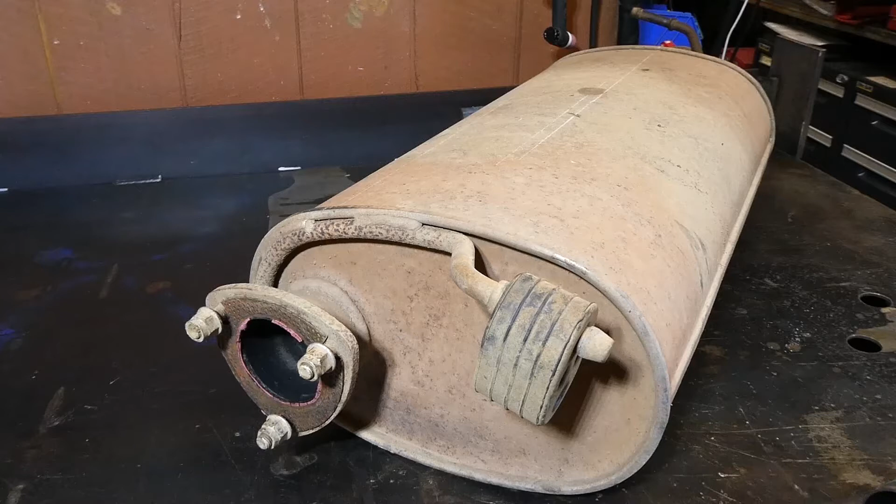Here we've got a Land Rover Defender muffler, which is due to be swapped out for a little bit of exhaust work on the car. So yeah, this particular unit's all mild steel. We've gone through the steps of marking up the lines, roughly, the inlets and outlets. They are offset by about 85mm.

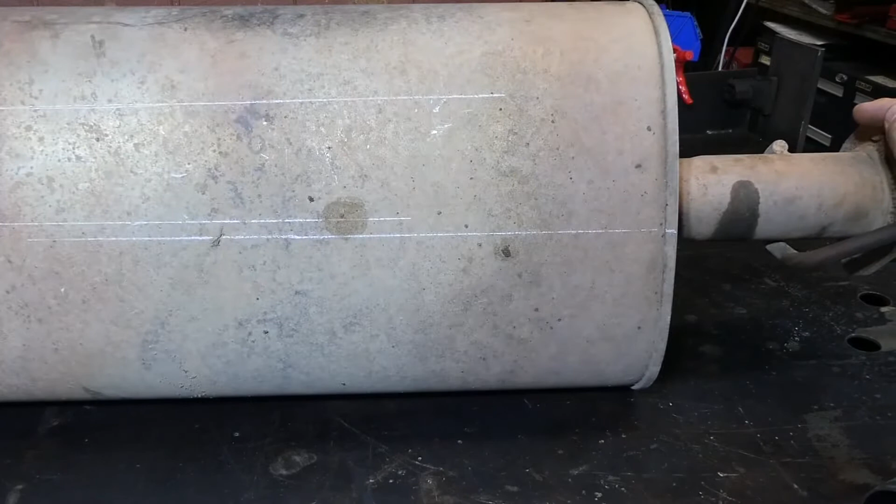So what we've got is the opportunity to make some exhaust piping with a fairly steady bend to allow this whole unit to be replaced. So we've got a 3-bolt exhaust flange on that side. On this far side we've just got the old 2-bolt style.

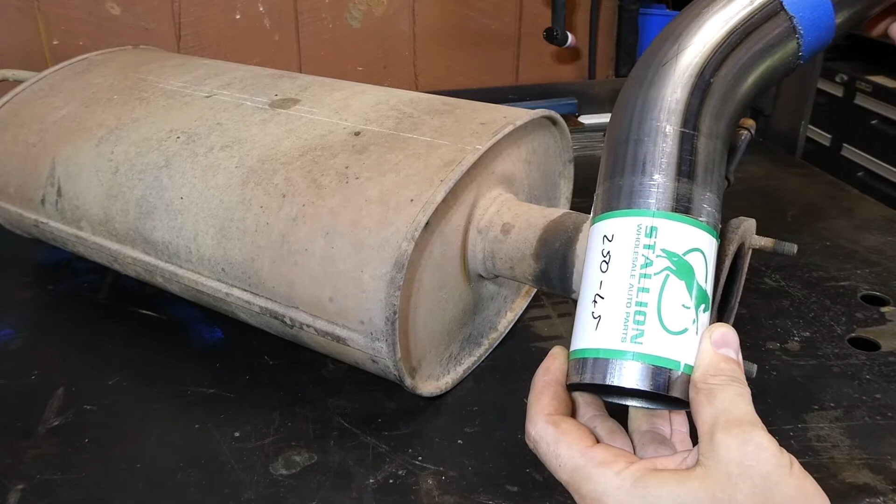Yeah, we'll be replacing it with these sections of aluminized mild steel exhaust piping, which has been marked out and cut on the bandsaw. So this is a 45-degree bend. You can buy these off the shelf. This is a 2.5-inch diameter pipe.

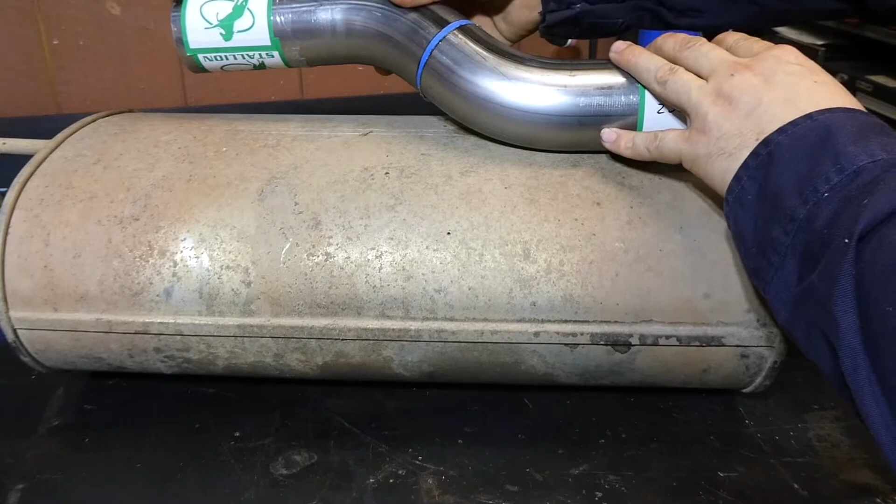So yeah, with this we should be able to get the whole unit squared away with a series of bends which will match the required angle. So yeah, we'll do some welding on this, run through a few little features and things that we're doing with the welding process and the prep potentially, and see how it works in a real world application. So let's get into it.

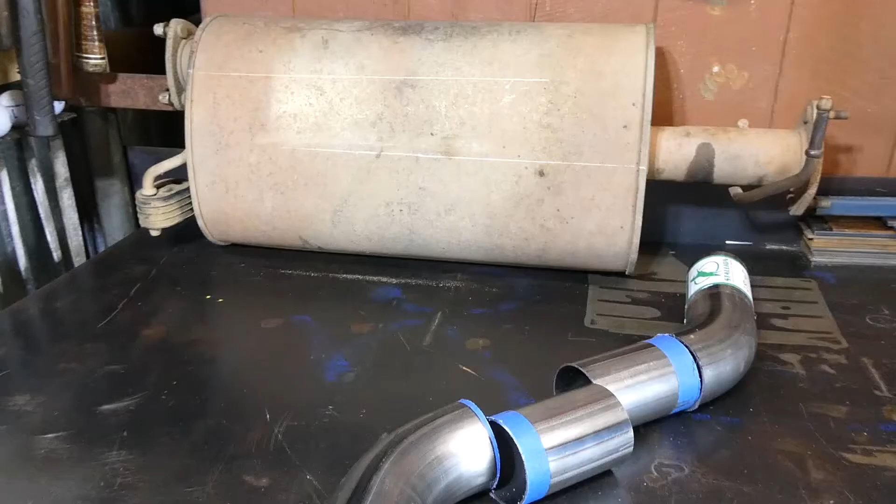So the concern with getting this exhaust pipe made is that we've got this muffler here with an offset pipe inlet and outlet, and what we've got here is two lines which are roughly 85mm apart. We're just using 80mm as our offset, just as a round number. But the problem we're faced with is we've got our two 45-degree bends, which we can see here, and we need to pretty much chop a section out of the middle, like you can see we've done, to make sure that the outlet on this side and this line, where they join, creates that 80mm offset.

So to do that took a little bit of thinking. Thought I might go through the rationale of what a bit of basic, really amateur level pipe fitting might look like. So we'll pause it here, I'll get some drawing happening and we'll see if we can explain it.

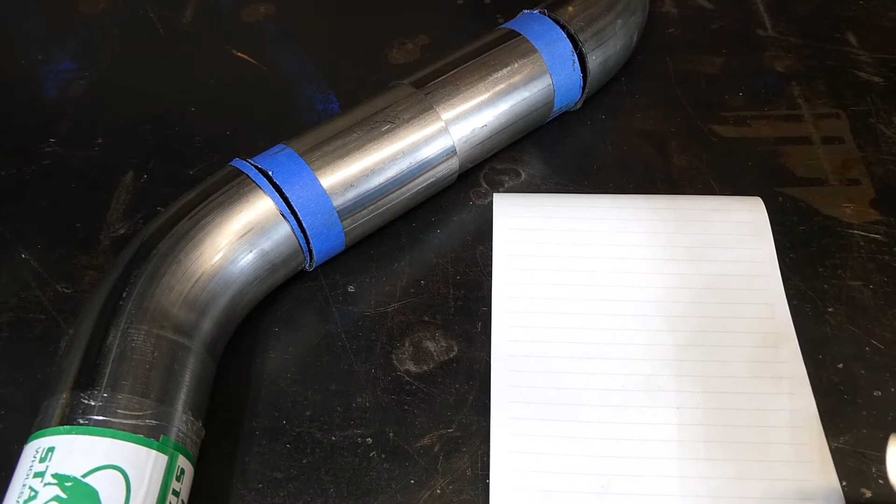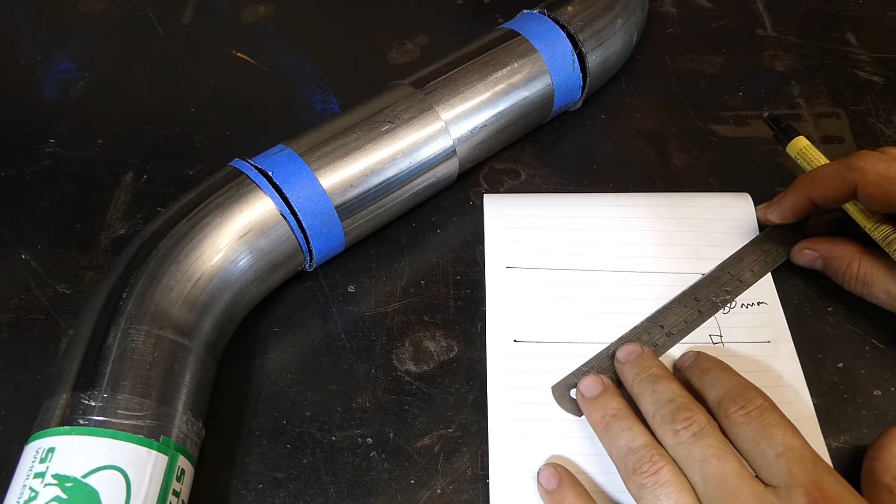So yeah, thinking about our conundrum, we've got two pipes, an inlet and an outlet, and we can assume they're sort of parallel lines. And then from there we know that this distance from here to here is 80mm, and we'll assume that's a right angle. And then essentially what we've got is a right angle triangle with a 45-degree bend here, which is our first pipe, and sorry, 45-degree here, of course, and then 45 degrees here.

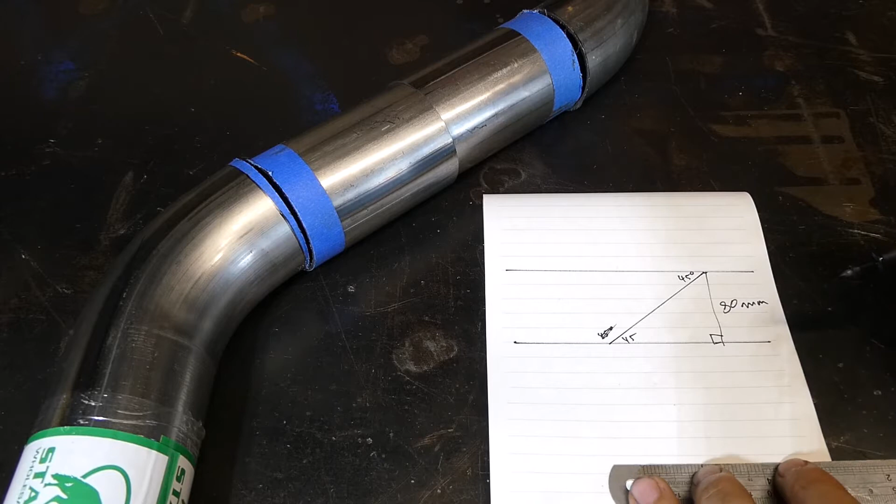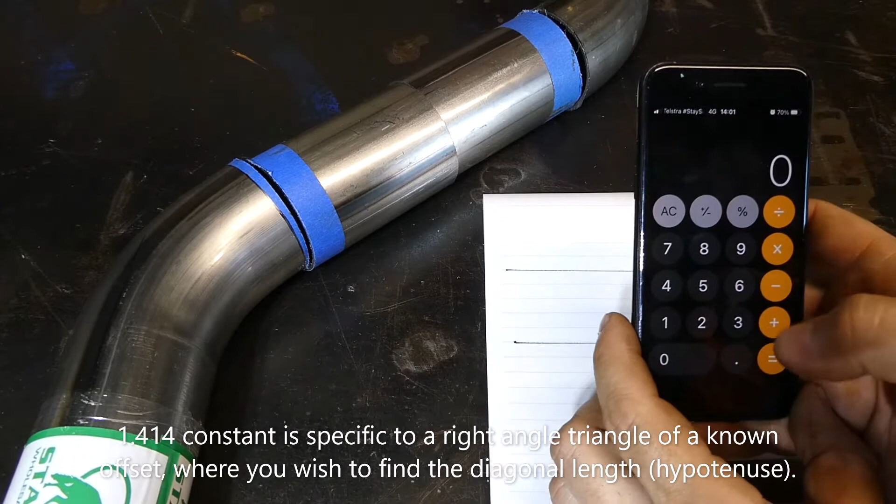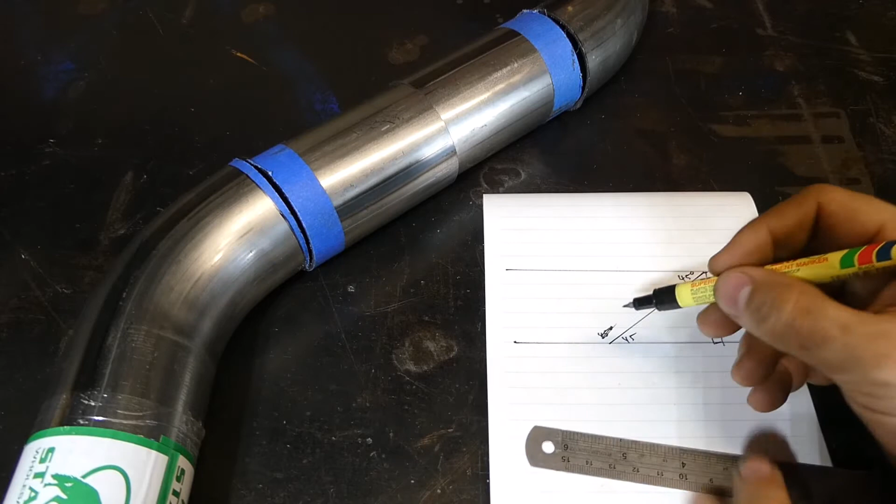So from there it becomes a trigonometry calculation, which people may remember from school, but long time ago. So the rule of thumb to use is the constant for, I believe it's one of the trigonometric functions, which is 1.414. So from there we'd take the 80mm offset, this amount here, times the constant for 45, which is 1.414, and that gives us this number, which is essentially the distance between the center line of this pipe, which is a 45-degree bend. So if you can imagine the exhaust pipe goes like this, and this line is actually the center line of the pipe.

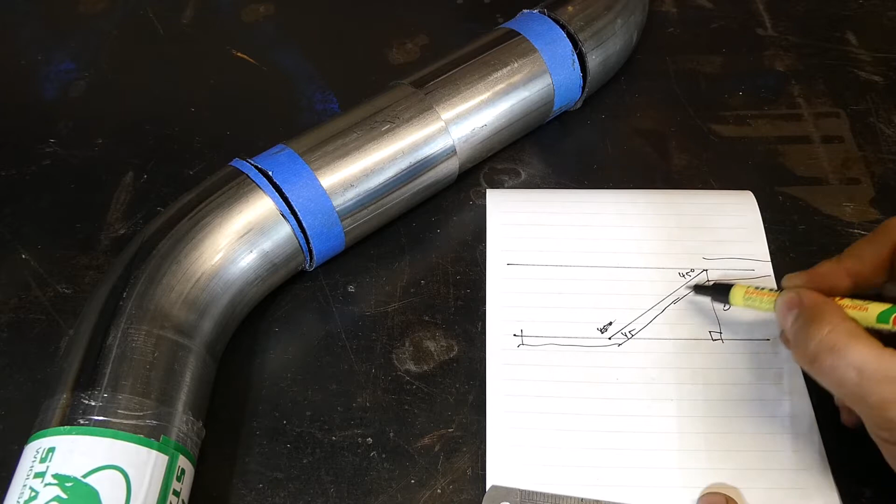So when we get to it, we can get our pipe. I don't even know whether you'll see this. There it is. So that line there is roughly the center line of this pipe. For all intents and purposes on this job, we just eyeballed it. And then from this point here, which is the crossover between the center for this length and the center for the length we've cut off, from that point there, 113 millimeters is where we made our cut.

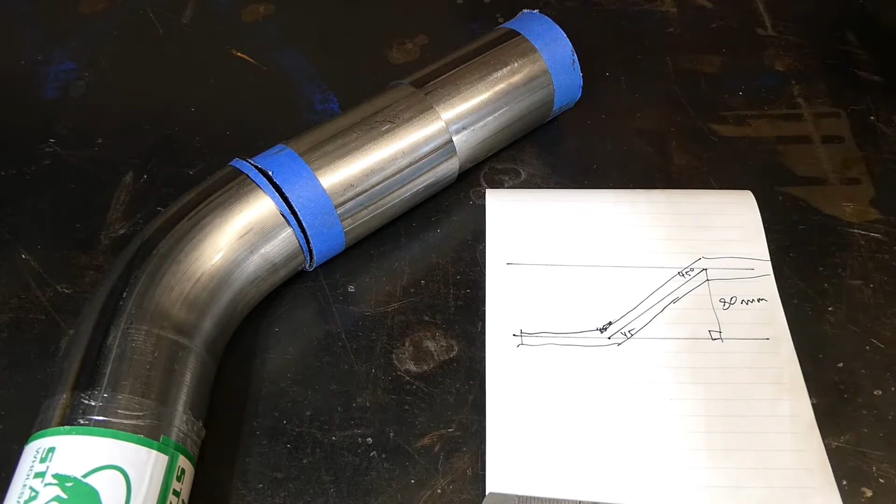So that gives us the cut lines that we have to make, which now gives us roughly, within exhaust pipe tolerances, which aren't massive, our offset that we need of 80 millimeters. So yeah, that's the easy way around it. The alternative is to cut, fit, measure, cut, fit, measure, and a fair bit of work, but remembering the constant of 1.414 and multiplying that by your offset height, you can quite easily get the number that you need, and that will put you pretty much in the ballpark.

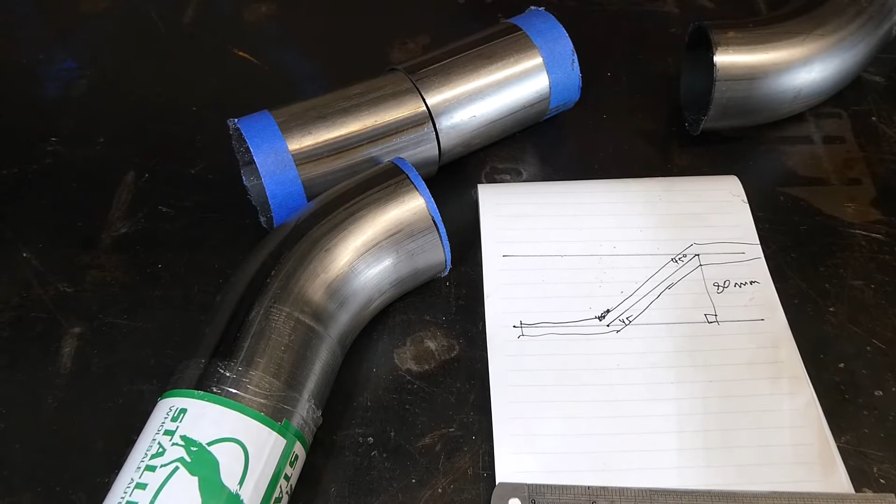So yeah, next step, we'll clean the pipe up and get it ready for some tacking. So to prep the pipe, we've cut it on the bandsaw. We've got a bit of a burr on the inside, as you might be able to see. See it quite pronounced over there. So we've got this handy dandy deburring tool, which we can just run around the inside.

And that cleans it right up. We've still got the outside to worry about. We've still got the remnants of our tape on here that was there from our markup phase when we were trying to measure our circumference around the pipe. In a perfect world, we'd have something like a pipe wrap or something that's a bit less flexible in its long dimension to allow us to go around the pipe, but for this one it was just a piece of tape and we just sort of eyeballed it.

The bandsaw that I used cuts somewhat straight, but from there there's a bit of work with, in this case, a half round file, which will clean it up and give us a good enough finish to get a weld on. So yeah, we'll do this off camera and come back when it's ready to weld.

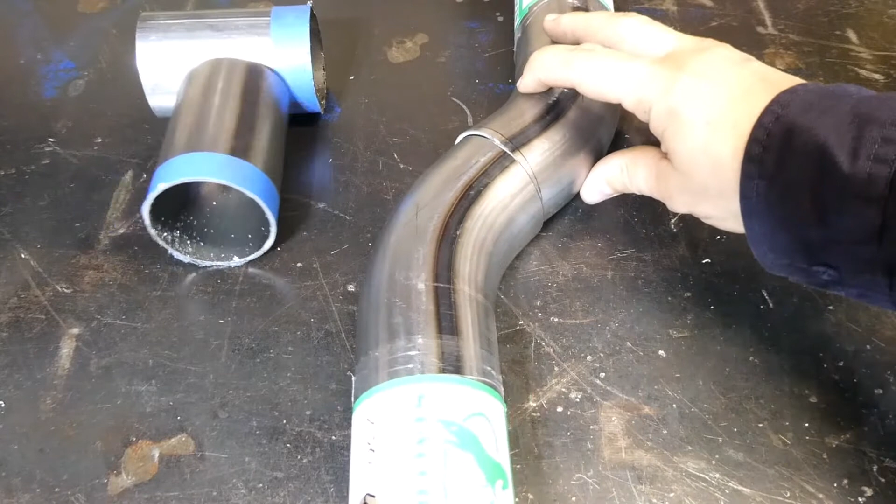So yeah, started out, silly me, had the hand tools out, then realised I've got a linishing belt on a multi-tool on a bench grinder. So gave that a bit of a razz up, a bit too noisy and wild to have on camera with any sort of worthwhile content. Cleaned it right up. We've got some nice straight edges, somewhat straight edges, which now gives us an almost perfect bend to allow our 80mm offset.

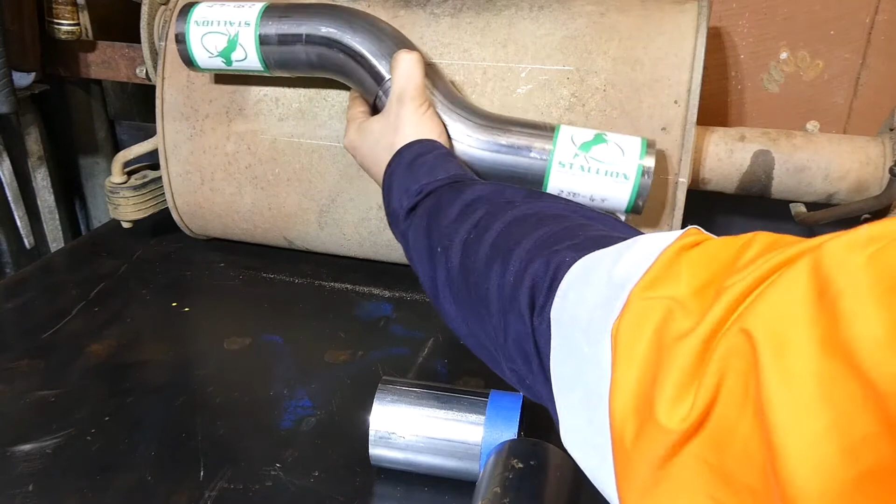So there we are. That's what we've got. As it stands, the distance between here and there is about 80mm. So that will meet our offset requirement for our replacement of our muffler. So that will fit right in there like so. Hard to see with a hand in the way, but you get the idea. And that's ready to start fitting up. So yeah, here we go.

So before we start welding, I'll just go through the setup that I'm using. This is the EWM torch for the Tetrix 230 that I've got. This is a 26 series TIG torch. And what I've got with it is the stubby kit. This is a stubby kit from Binzel, who make a lot of welding torch related gear. Thought I'd run through the setup.

It's pretty basic. We've got a gas lens, which has got a gauze. This is for a 2.4 tungsten. So this just screws into the front of the torch like so. It's just finger tight, and then I usually, don't hate on me, just give it a little bit of a turn so that it makes electrical contact, not enough to bugger the threads up or anything.

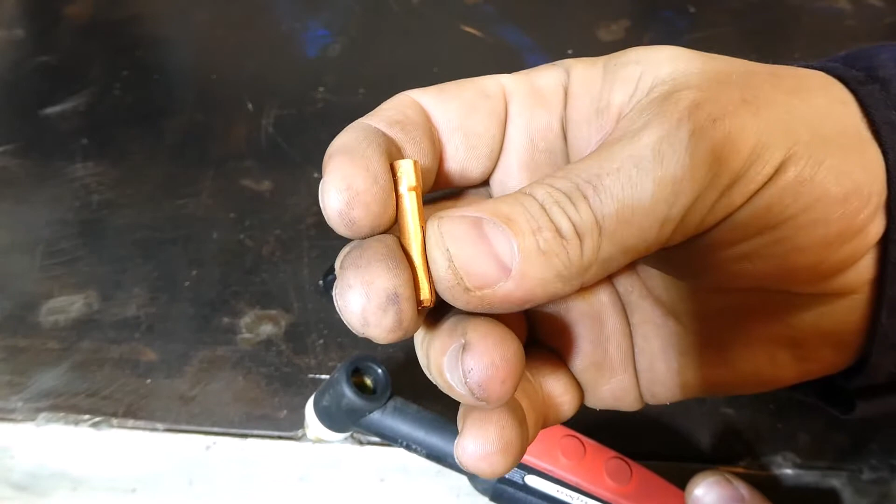We've got a short collet, which is a split type. You might be able to see the split. That just grips the tungsten by compression. These are specific to the size of tungstens you use. Here we've got a nicely sharpened grey tipped ceriated tungsten, I think it is, which is nice and short, so that will go into the torch assembly like so. Probably do it from the other end.

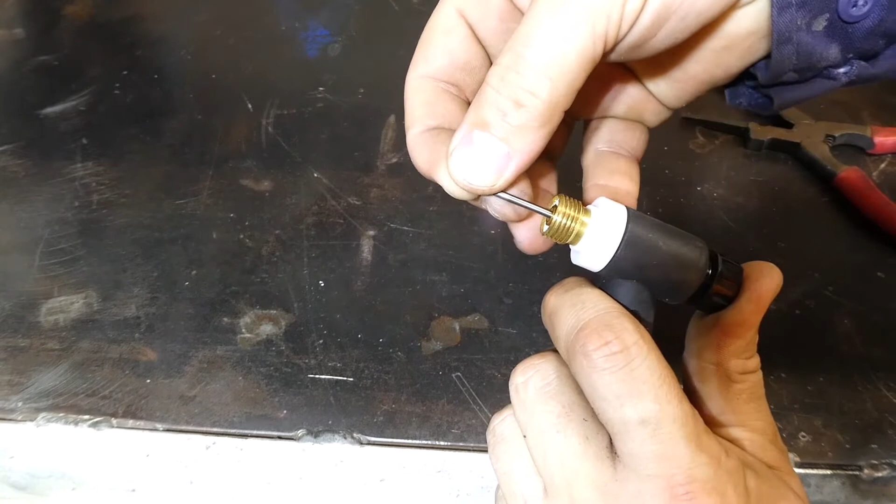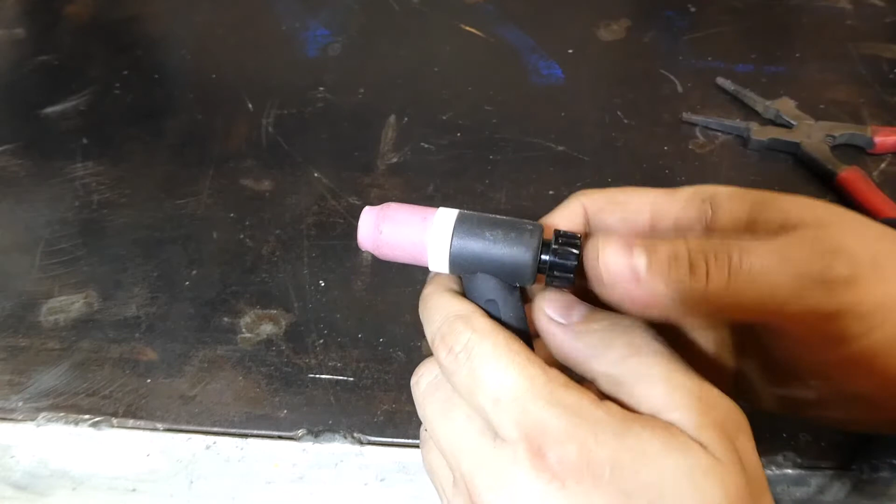This is a stubby back cap. No need to run a stubby, but because I've got a short tungsten in there, there's no need to have it stupid long. This will fit in there like so, and this alumina cup is a number 7, so that's 7/16 of an inch. Try and keep you in frame. That goes on the front of the torch like so, just finger tight, and maintain the tungsten stick out.

You can get real technical and measure this, but generally you don't want it any longer than the internal bore of the cup. So I usually just do just long enough. I just eyeball it, I don't get super critical with it. Tighten it up, that compresses everything within the torch, and now that tungsten is not going anywhere. We've got good electrical conductivity through the torch and the torch neck, and we're ready to rock and roll. So we'll go to the machine, show what the settings are like. We might use Spotmatic on this one. See how we travel.

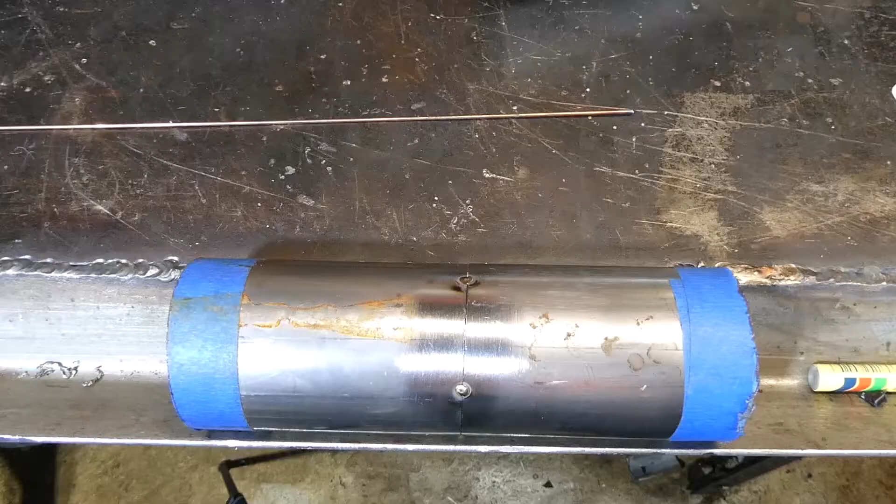So I've just finished doing some test tacks on the offcut from our exhaust tubing. I've set the machine up to 60 amps with a 3 second spot time. And the prep we've done on this aluminized pipe is just a quick brush with a stainless steel wire brush. So you can see with the tacks we've got, the fit up's not too bad. It's better than what you'd get with an angle grinder. But we've got nice flat tacks. Got very little issues with those, even there where the gap has opened up a bit.

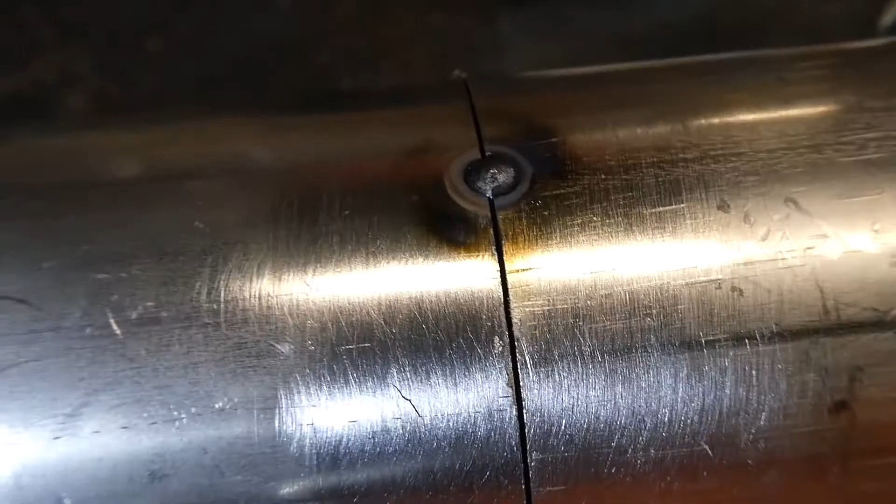We were using a 1.6mm steel TIG filler rod, which is enough for what we need. And see that one, that was at a shorter time, I think 1 second spot time. And that one a bit cold as well. And that was the starting amperage, which was 100 amps and way too hot. So that was at 0.5 second, 100 amps. So not enough, and obviously no filler there either, other than the big one right in the middle. So not how to do it, getting better, acceptable. So now it's time to burn some actual material and get it done.

Righto, so just running through the settings on the machine. If you've watched this channel before, you'll know this is the Tetrix 230 from EWM. This machine is currently set up in DC mode, obviously in its TIG welding function. Here you can see the red light is illuminated. That means Spotmatic, so that's an automatic spot welding function.

So what essentially happens is when you have your TIG torch and your tungsten, once you touch the job, the arc will initiate and it will run through a spot for a defined period of time. In this case, 3 seconds time for the spot. We're welding at 60 amps. And yeah, that's pretty much the long and the short of it. I'll probably add a bit of filler just to get the tack started and then wet it down.

When I hit the trigger button on the torch, the red light there will start flashing, which will mean that it's ready to spot weld once the tungsten contacts the job, and then you lift off and then it initiates, with a high frequency start. So that's pretty much the settings. Not too much more to go into there. Main idea, 60 amps, 3 seconds with some filler.

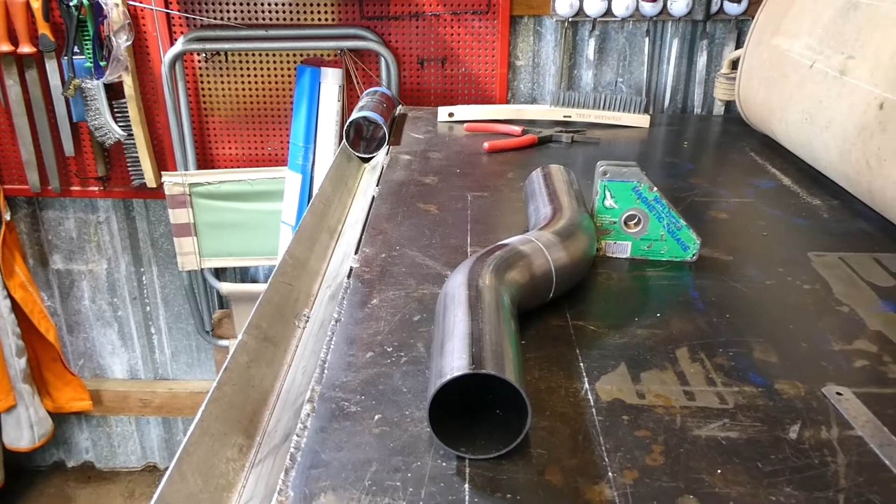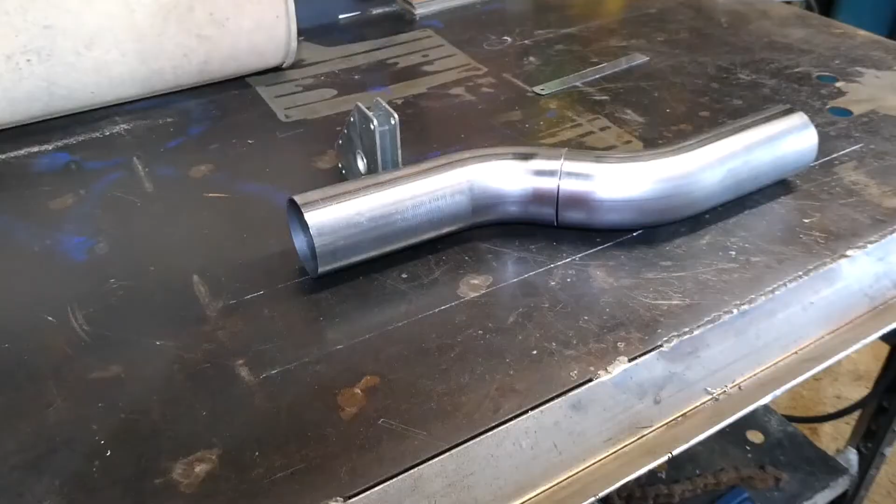Rightio, so this is the fit up for our exhaust pipe. I've just scribed 2 lines on the workbench, being 85mm apart, and our joint's been prepared with a wire brush. Got a magnet there just to hold everything in line. You can see it's pretty much bang on where it needs to be. So that will mimic the offset of these pipes, these flanges. So we'll see if we can get this camera tripod set up. And yes, here we go.

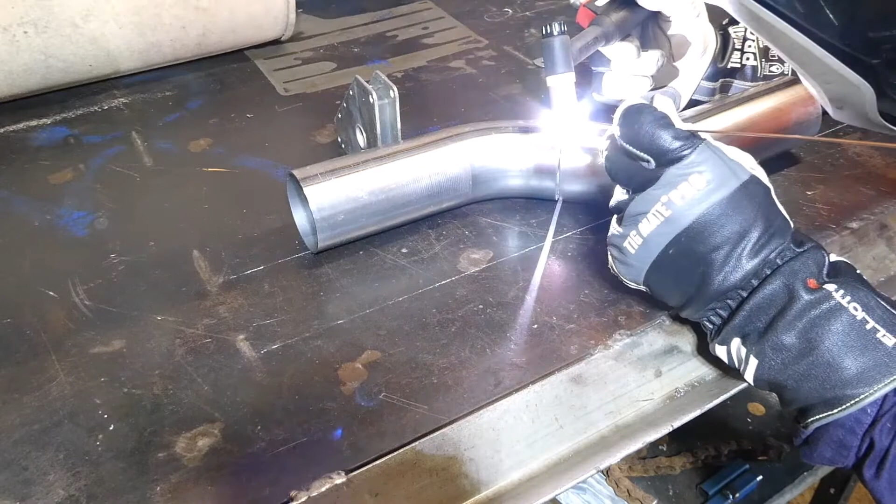So TIG torch is all set up. We've got our earth clamp up the back on the bench. We've got our filler. Try and do this all around the camera. Get some weight off that cable. And here we go. So I've just hit the trigger button to commence the spot timer, or Spotmatic. Contact the job, lift off. So that one's not too bad. We'll give it another shot this time around here.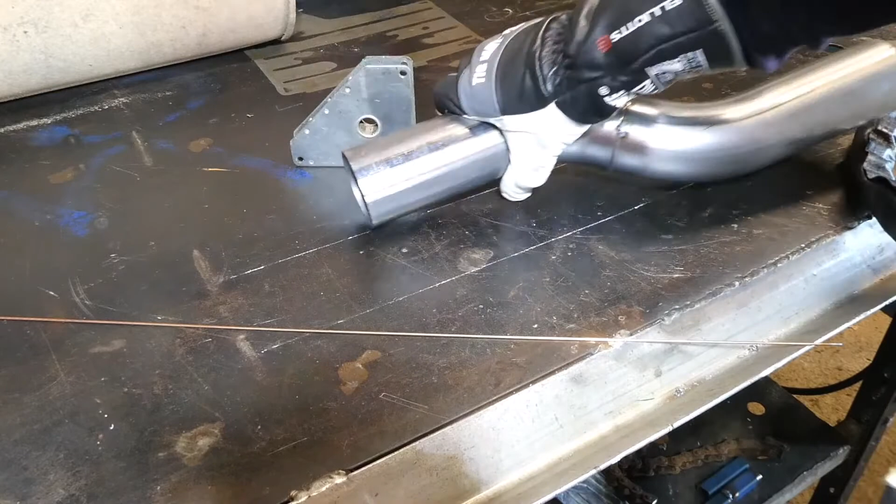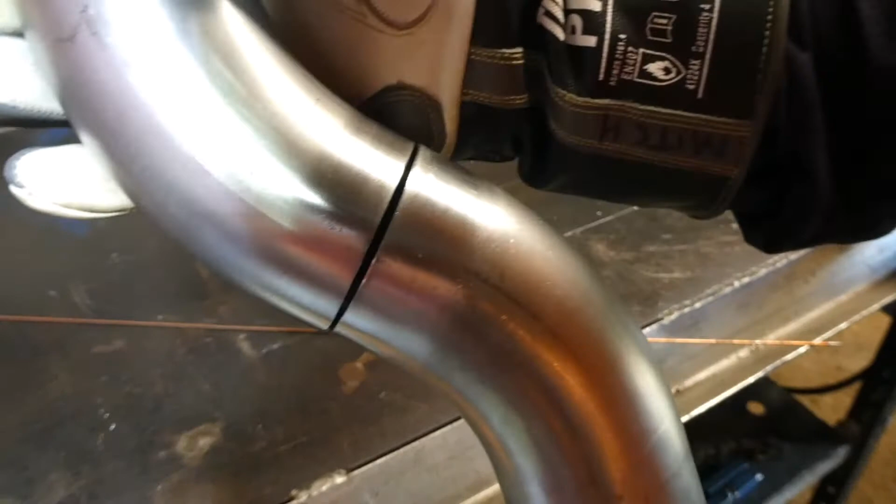We just gave that one a second hit so that it melts in. As it stands, that's tacked. Not great, but it's holding. Got a bit of a gap issue on the other side, which we might try and bend into place. Give it a bit of percussive maintenance. Alright, stay tuned for the next instalment.

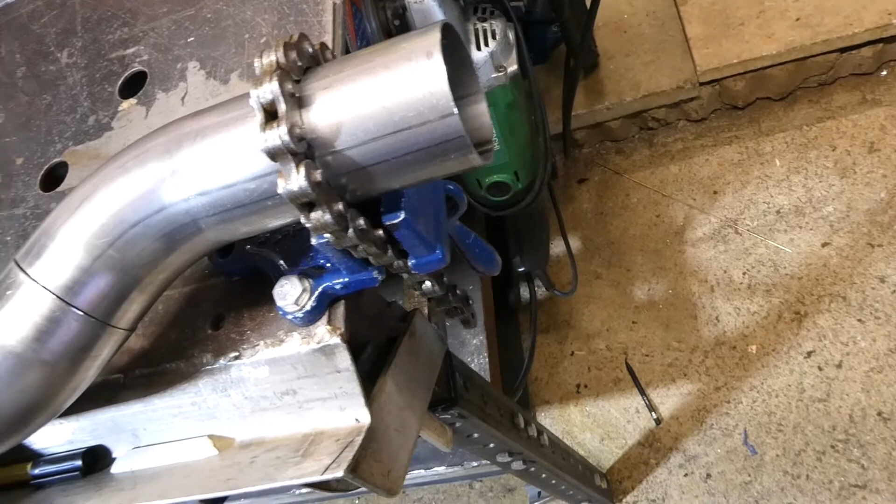So to close the gap up, we've gone a fair bit of the way to making that somewhat acceptable. Just bolted it into the pipe vise there, and then used some steel shims to tweak everything in the direction it needs to go. The fit up isn't 100% on, there's maybe half a mil in it, but with a bit of pressure in the right direction and a bit of attack with the welder, I think we'll be where we need to be. So see if we can get you set up there.

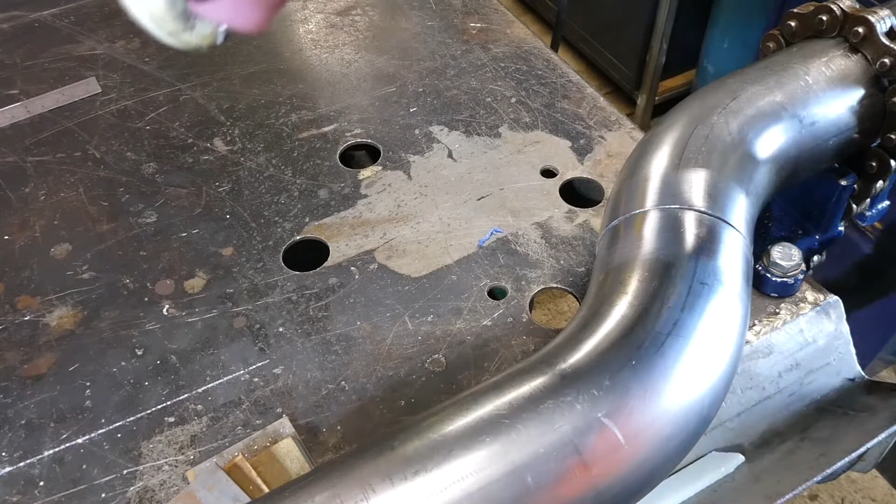The benefit of that Spotmatic function is that you don't have to touch a button to weld. You can just get it started where you want, and then you can choke right up on it if you need to, or use another hand to manipulate the job, and you'll be set.

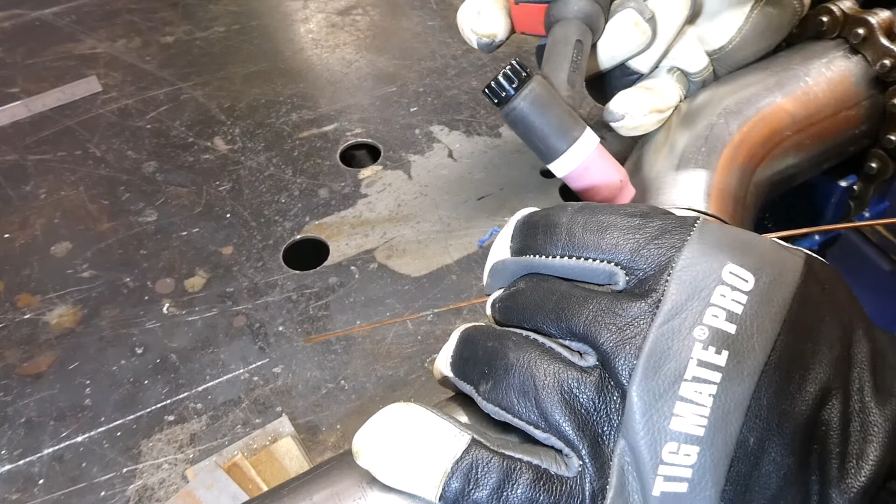So just give it a bit of a nudge in the right direction, helmet down, touch off, and that's fused, so that's good. Follow it up with a tack over here, touch off, grab a filler, wet it around, and we're done. So that's as easy as it is. Now it's just a matter of getting it welded out, which I won't subject you to on camera.

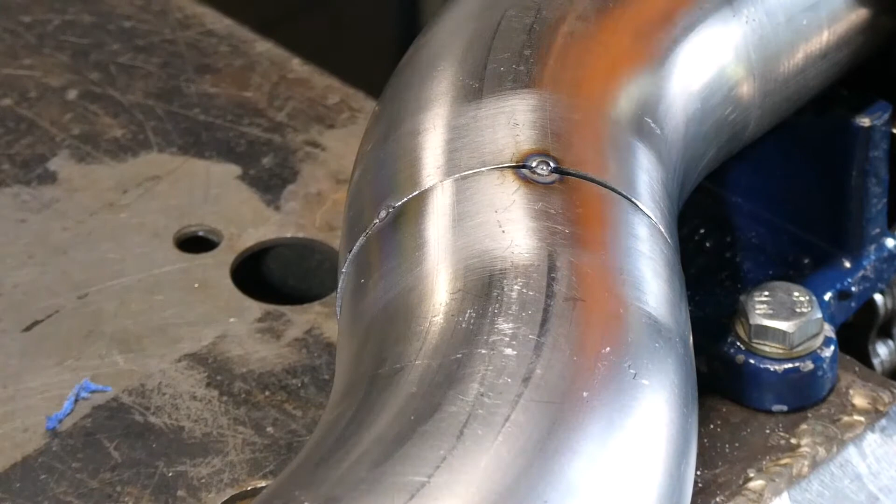Right, time to weld it out. We've decided to switch things up a bit. We've got the machine set on its kilohertz pulsing range, so we're going to give this a whirl because we can, at 7,000 hertz pulse frequency. Don't know whether the camera will pick it up, but it'll be a really high pitched noise. We should just be able to trace the line and fill it in without too much filler metal. There's no welding lens on this camera, so it might get a bit bright, but if you're afraid of an arc flash, cover your eyes.

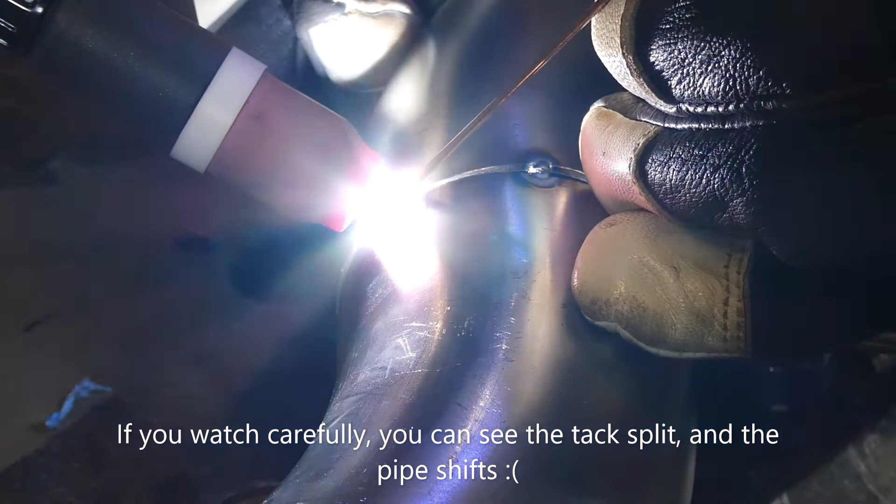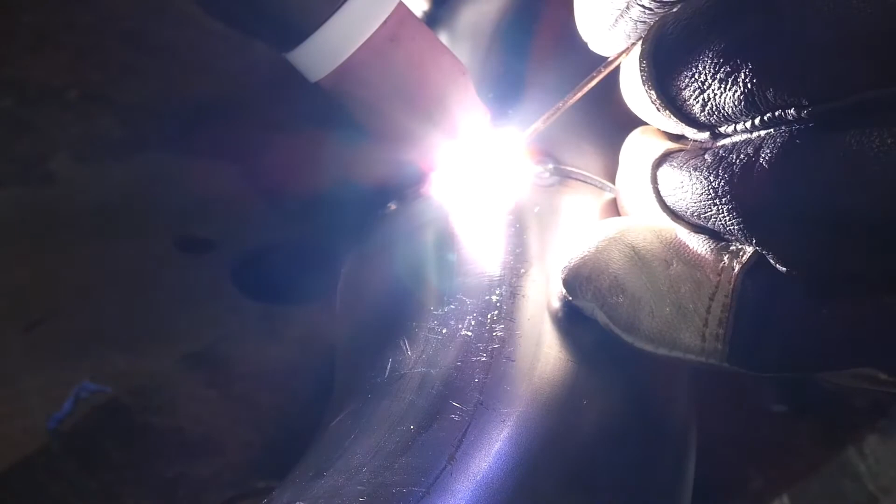Needed a bit more filler than we thought, so we'll drop the amps a bit, I think. And yeah, that was an area of some pretty crappy fit up, so we've got a bit of a gap to deal with. So what we might do is loosen it off a bit, see if we can get some action on the other side. And give that a whirl.

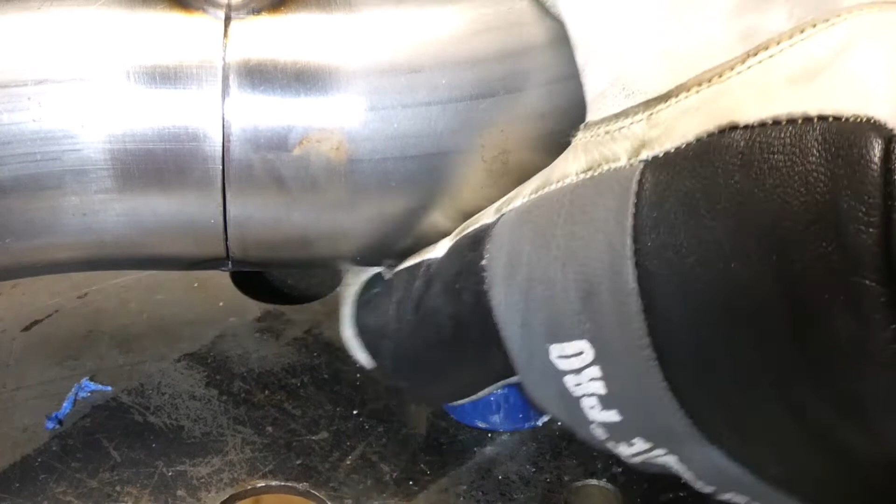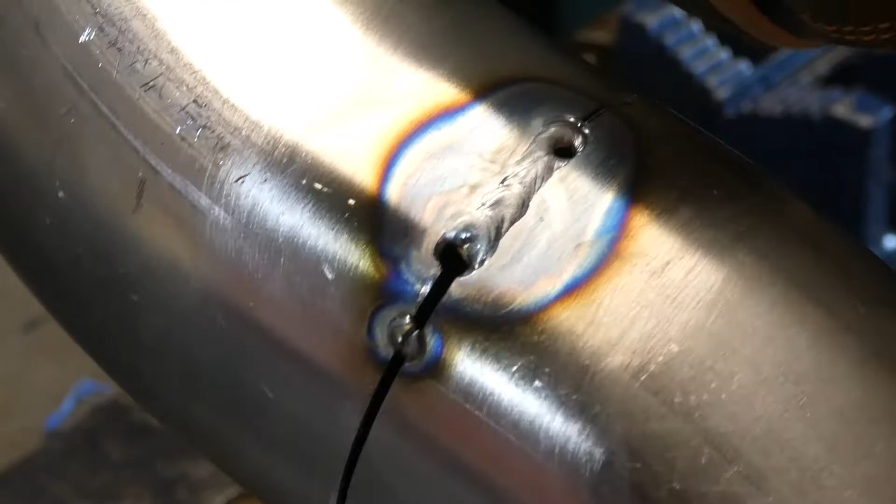That went a bit better, so went to plan. Didn't blow any holes through this time, so go me. If it will focus. So you can see the fit up gets worse and worse as we go around. We actually cracked our tack that we'd begun with and started to keyhole there at the start, so that's a pain. But anyway, we'll persevere and see if we can get a picture of the finished product once it's done.

So the next point in the exhaust build is to work out how long our bend needs to be overall from flange to flange, to replace that whole muffler section. So I laid it on the bench, marked it out, drew a vertical line off each flange surface, gave ourselves a mark on the bench there, which conveniently turns out to be 750mm.

So that's an easy number to work off. Yeah, so now we just need to extend our exhaust pipe from the bend end to 750mm on one side or both. I'm not sure how I'll do that yet, but that's the game plan.

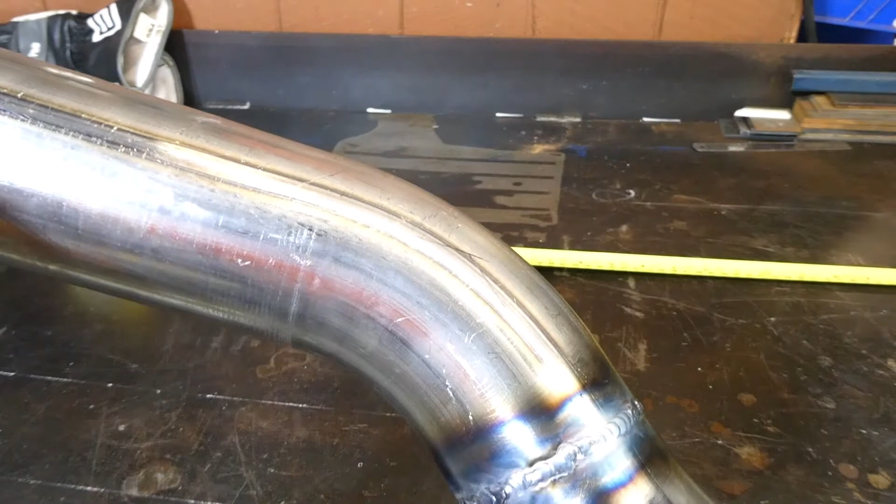Now, this being the internet, those of you that have been around for a while probably know this is a cruel and nasty place. So as such, disclaimer, this is not a weld porn channel. You're not going to get any Instagram worthy beads around here, so I'm only going to show you the good bit. So there you go.

I actually switched it up to a standard pulse setting with half a second peak current at 60 amps with a background current of around 30 for 1.5 seconds. So yeah, burst of heat with a background current allowed a good amount of time to gradually feed filler.

When we look inside this, can't even see it, but inside the penetration is good. We don't have any significant problems in there which are going to give us any grief, and overall I think that's, for its intended use, which is an exhaust system in a four-wheel drive, a dirty old Land Rover, this will be more than adequate. So yeah, I'll probably let the skills develop a bit before I start welding up parts for Ferrari or NASCAR or the V8 supercars, but until then this will have to do.

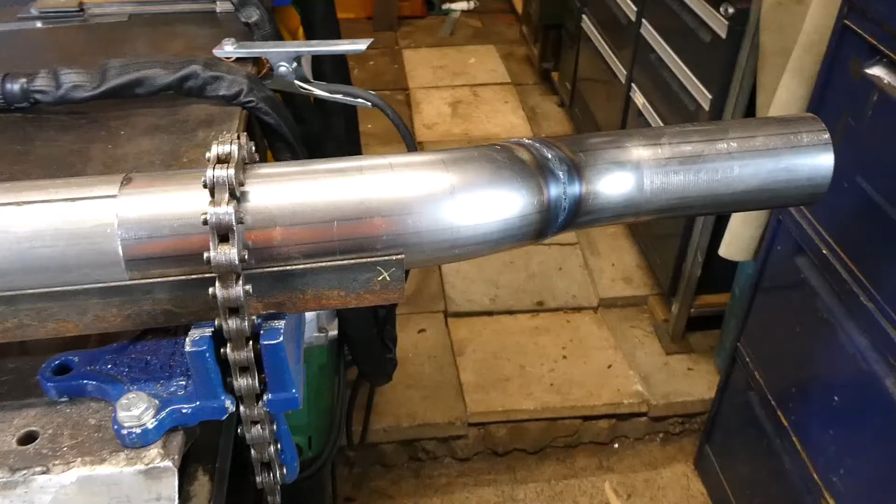And yeah, now the next section is to get set up on the overall length of the exhaust section. So, righto, this is the bend assembly there that's been welded up. Just got this new section, 325mm long, from there to there, marked, cut out, deburred, and we've been doing some fit up on this one. So good lesson, unlike before when I blew a few holes through the initial part there due to poor fit up. Here we're taking our time, learning from our mistakes and doing it properly.

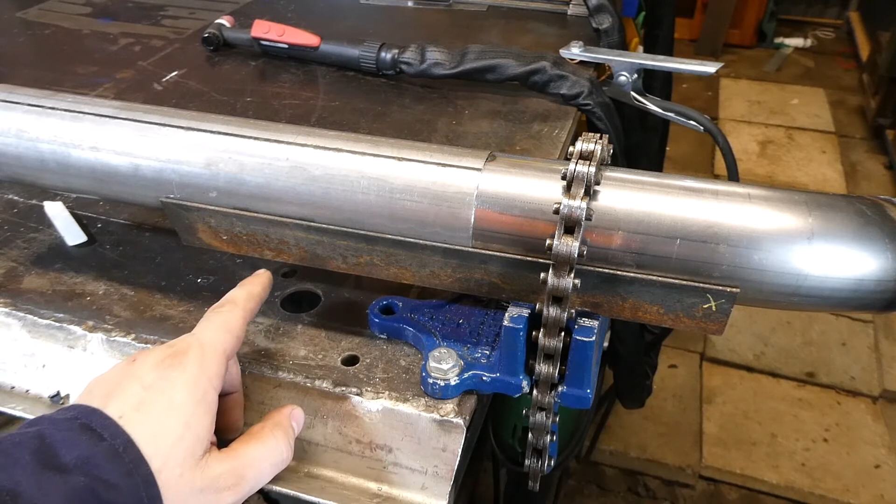So we've got this in the pipe vise, we've just got a piece of angle clamped down. This is just allowing a straight channel for everything to sit into. We're dealing with round material here, pipe, tube, which we've put a reference mark on. You can see a black mark there. Got another reference line on the other side, which we're lining up to, and we've been going back and forwards to the linisher to take off any high spots and make sure that fit up is good. So at the moment this is a very smooth transition. There's no significant areas, high or low, or gaps to bridge. So this should allow the weld fit up to be quite satisfactory.

So yeah, comes the point where we'll get to welding again. We might give that kilohertz pulsing another go. See if we can get some action there. So we'll pause the video for a sec. We'll get the machine set up, get geared up, and get ready to lay some more weld. Alright, back into it again. We've given the material a bit of a brush up with

wire brush. Just over there, we stole Alan's brush. Hopefully he doesn't mind. So, alright, enough lame jokes, let's get into it.

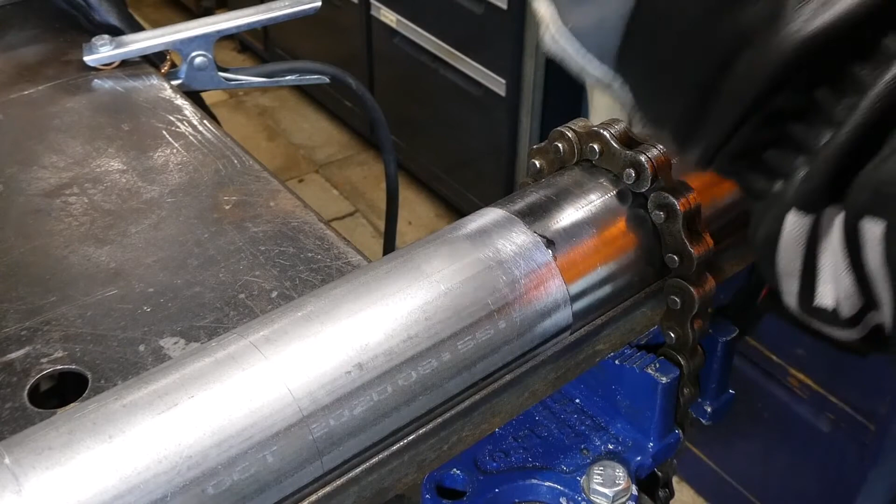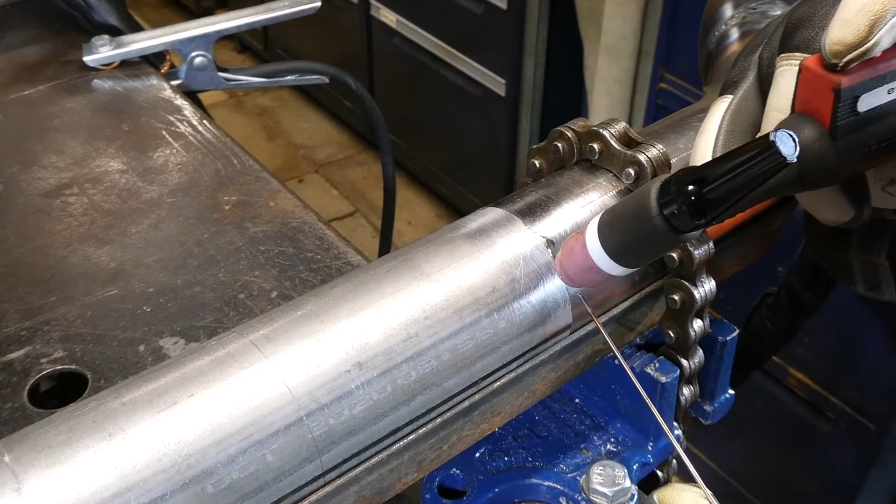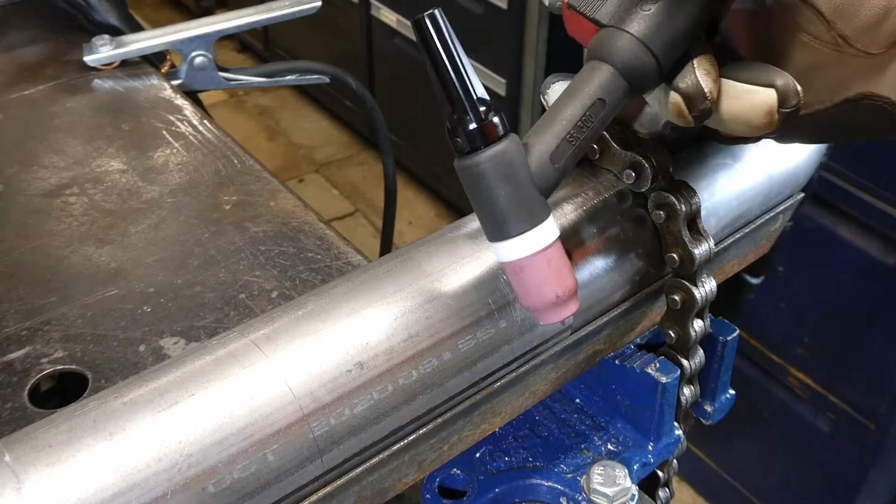So, once again, just to recap, we're on kilohertz pulsing, 6 kilohertz, 60 amps. Yeah, we'll see how far we can get through without any filler, but we'll give it a red hot go. Contact. Anyone playing along at home, I've just changed the torch consumables, just whacked a longer tungsten in there and put a medium back cap on.

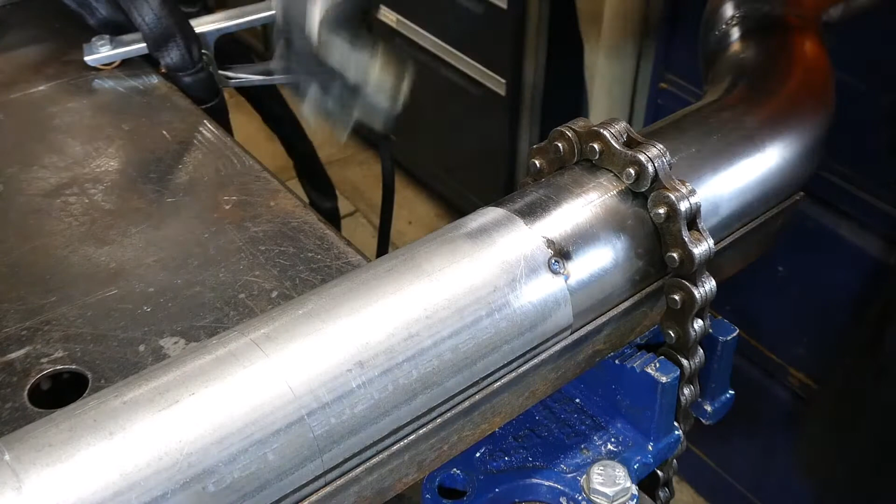Beauty of YouTube and video editing is that all my mistakes you don't get to see. So this could very well, in your eyes, be a flawless victory. In actual fact, far from it.

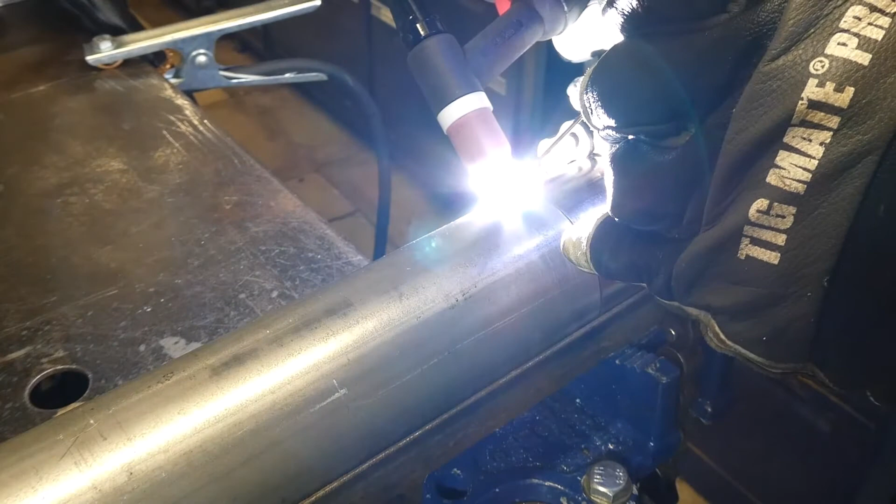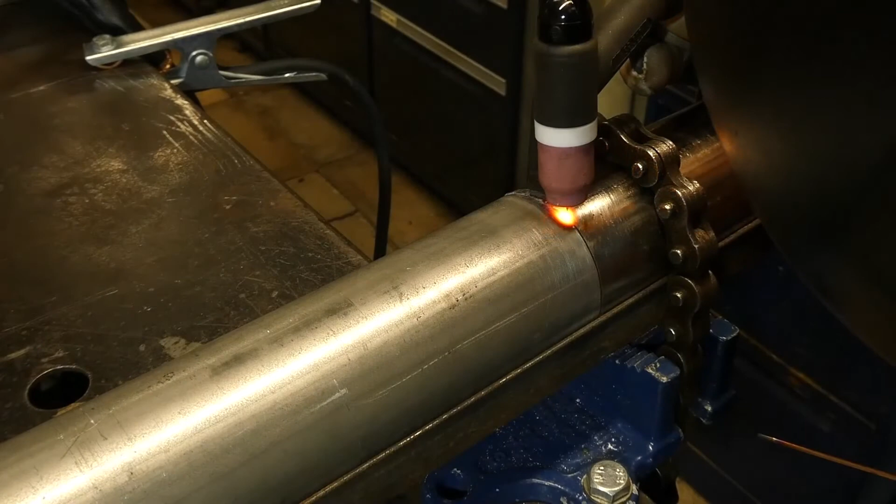Right, just rotating the assembly around. You can see the fit up's remaining quite good. Alright, whack another tack on there and see if we can do a bit of a longer pass. So seems to be welding quite well without any filler at all. Yeah, we'll keep on cracking along with it.

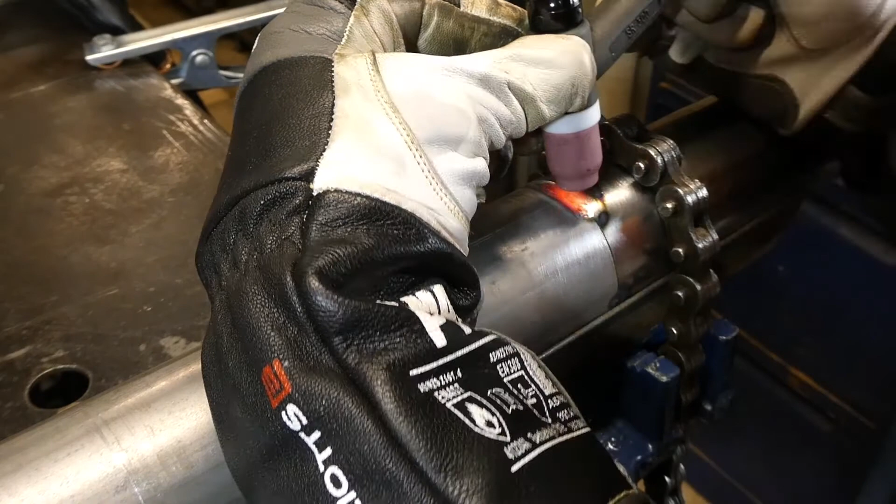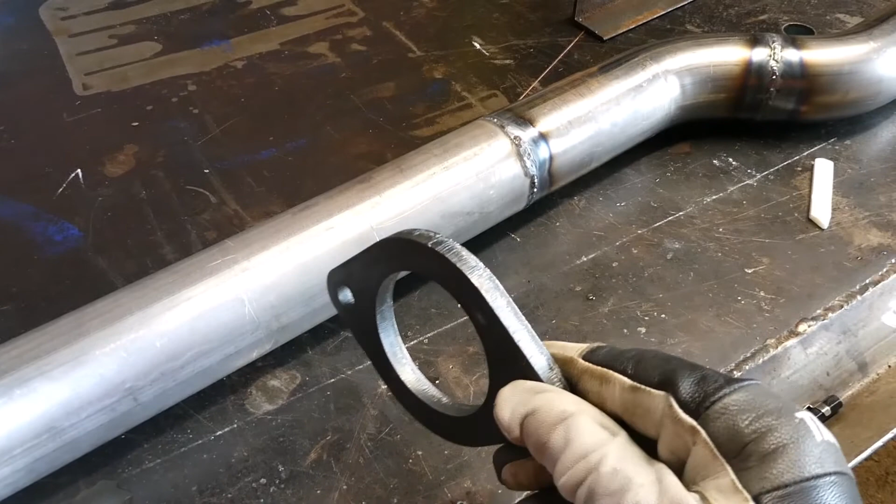That's actually getting a bit hot. Anyway, we'll finish welding out and show you at the end. So that's the weld out done. Yeah, once again, the overall length of the pipe is good. We just need to whack a couple of flanges on the ends. The inside diameter of this flange is a bit larger than the outside diameter of the pipe, so that will just fit over, and then we'll just run a weld around the inside just to secure it off, and probably a couple of tacks on the pipe side. Probably have to do that on the car just so that everything lines up with where it needs to be.

So yeah, another successful fabrication project brought to you by the shed, beer, and a nice welder.